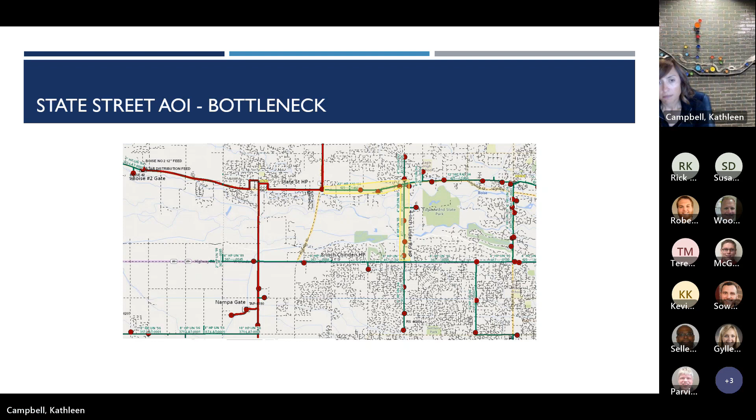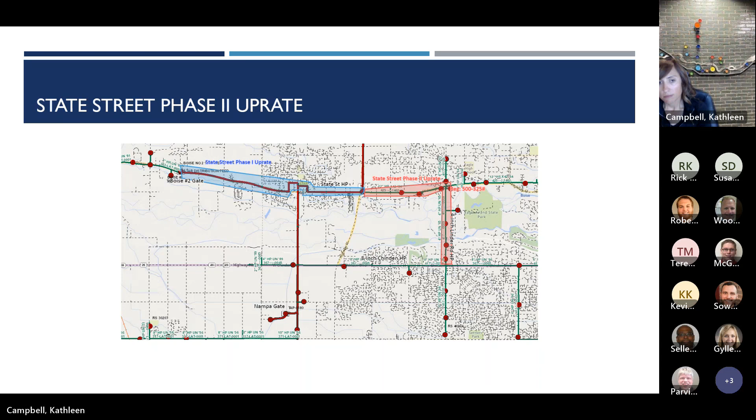So yeah, I think this is the last slide I had. Any questions on the State Street AOI? Okay. We'll move on. Next up, we got the Central Ada AOI. So this AOI needs reinforcement by 2023 to meet the IRP growth predictions. Its capacity limiter is the 10-inch and 8-inch high pressure bottleneck on Meridian Road and Victory Road.

This one was discussed at length in the 2021 IRP, and we selected the 12-inch South Boise Loop. The 12-inch South Boise Loop, actually another one of my projects, is going to be online in fall of this year. We're very close. And it's estimated to cost 17.9 million. And there's kind of 3 parts on the South Boise Loop.

So we upgraded the Kuna Gate station, and then we installed 3.7 miles of 12-inch high pressure up Cloverdale. It's called the 12-inch Cloverdale project. And then we're also going to do a regulator station near Victory and Cloverdale. And that station's going to cut from 500 to the 390. I'll show you in just a sec. I have some exhibits, so it's tough to verbally explain. I think I'll go through it again with the pictures.

But yeah, the Kuna gate's just about wrapped up, and the Cloverdale's online and in service. We're waiting to install a hoist system to do maintenance at the Kuna gate. So we've been working with a consultant on that design, and we're hoping to get that installed in the next couple months, so they can do maintenance and get it in service.

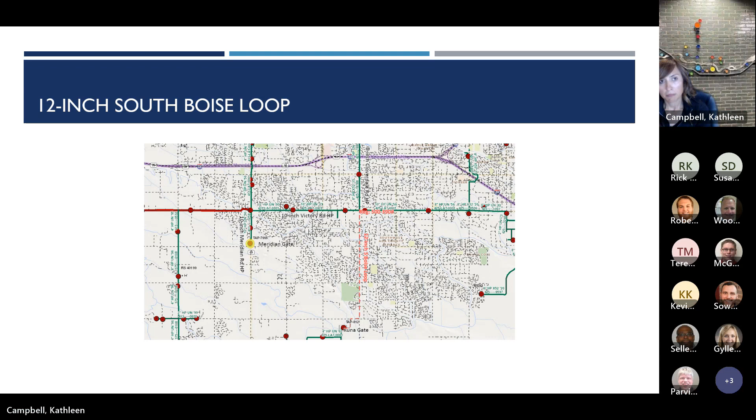So next up, we got the Sun Valley Lateral AOI. So this AOI requires reinforcement by 2023 to meet the IRP growth predictions. We briefly discussed, but the capacity limiter on this lateral is the end of line pressure to Ketchum. And basically all the flows are just at the end of the line on this lateral. So up in the resort community, lot of growth, condos, large houses, lot of gas demand up on the north section that has compromised the lateral.

Alternatives considered for this AOI were actually discussed back in the 2019 IRP, and we selected the Shoshone compressor station. The Shoshone compressor station is currently scheduled for commissioning this month. So they've been working hard getting that project installed. I know the compressor's on site. Most of the work on site's done for that.

The building's installed. They are just waiting on a little bit of electrical and site work to wrap up, and then they're going to go through commissioning. So that'll be online by fall. And then it's estimated to cost $6.7 million right now. It's the current estimate. I got some exhibits too.

So yeah, this is kind of the bottleneck, just end of line pressures, just so much flow, and pressure drop just down the lateral with all the flow at the end of the line. Currently we have the Jerome compressor station, kind of an older compressor station. It's been around for a little while. It's right here. And then on the next slide, we're putting the Shoshone compressor station just further north up the lateral. And it's near milepost 32 near Shoshone. Any questions on the Shoshone compressor station?

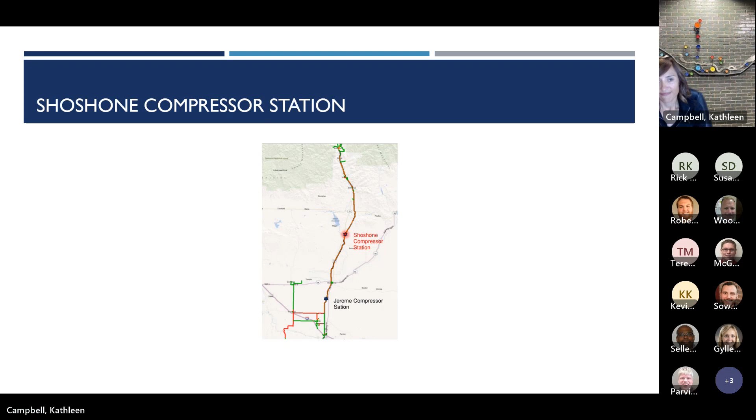Okay, so now I'm actually going to kick it over to Zach, and he's going to cover the Idaho Falls lateral. Yeah, thanks, Kathleen. Again, Zach Soward, engineer within the engineering services department. Be chatting about the Idaho Falls lateral. It was determined back in the 2021 IRP that in order to meet the growth predictions at that time, reinforcement would be needed by 2024. And really that capacity limiter is the end of line pressure up in St. Anthony.

Just to give you an idea of the system, we'll show an exhibit on the next slide, but we get gas from Williams down in Pocatello, and the IFL, Idaho Falls Lateral, takes that gas and pressure all the way north and ends at St. Anthony. Really the limiter at this point through growth modeling is the line pressure at St. Anthony right now. Alternatives were considered and discussed in the 2021 IRP, but ultimately that Blackfoot compressor station that Kathleen mentioned earlier, Rick, was selected as the appropriate option to support the additional growth and needs on the IFL.

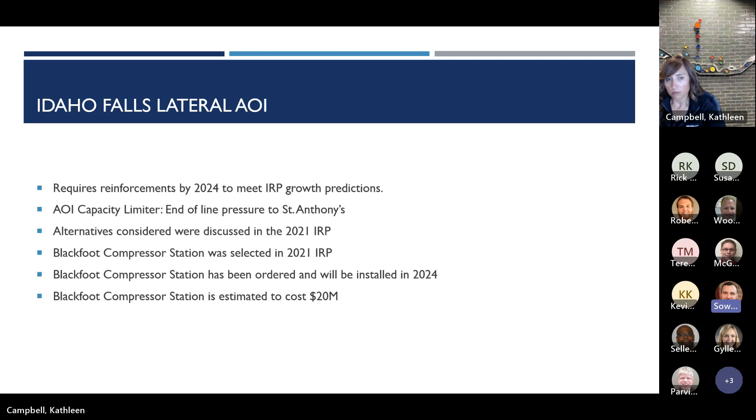The compressor station itself has been ordered through the manufacturer and is planned to be installed in 2024. There's building, land, and design considerations that are still underway right now. But the compressor station has been ordered. Altogether, the project does have an estimated cost of $20 million, and that would include the additional piping in order to pipe up to that new compressor station. If you want to go to the next slide, Kathleen.

This is that exhibit of the IFL as a whole, really with the gate station from Williams down in the south there in Pocatello, and these lines taking it all the way to the north in St. Anthony, experiencing a lot of growth immediately around Idaho Falls, but along the whole lateral as well. That growth really dropping pressures up in St. Anthony. We do currently have the Rexburg LNG facility that on Brian's slides you can see is currently meeting the demand as of this year, but by 2028 will not. So determining the need for additional reinforcement in that compressor station.

Rick, going back to your point, we did evaluate this year as well to make sure that is still the appropriate option, and that would still be the appropriate option for the IFL here. The next slide shows some proposed areas that we had worked on previously. We have determined that middle star there, where the current IFL comes together, we have land acquisition in place for that site right now. Again, looking at capacities, this compressor station would bring on roughly 21% additional capacity up to that St. Anthony area and along the lateral itself. Again, with the construction plan for 2024. Any questions on the IFL?

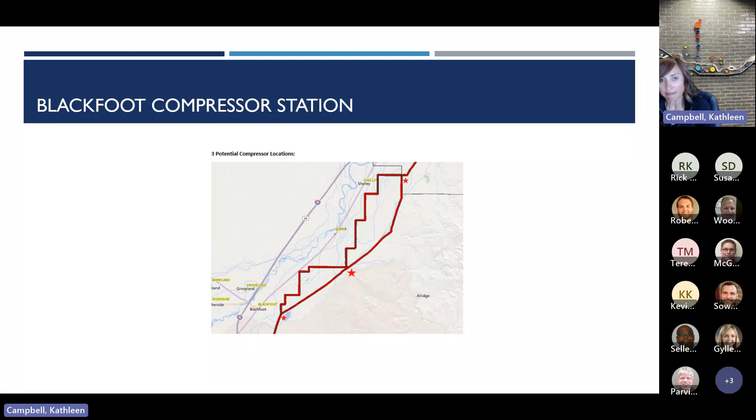For State Street, for timing, it needs reinforcement by 2025, and that will be the State Street uprate, and it'll bring us up to 950, I guess, 100,000 therms a day. And then also by 2026, we need the State Penn Gate upgrade. And that, I'll just point out this one, it doesn't increase capacity because it's limited by the State Street uprate capacity. Just the physical gate needs the upgrade.

And then for Canyon County AOI, it needs reinforcement by 2023, and that's the 12-inch Ustick Phase 3 project that's going to be starting construction very soon. And it's going to bring the capacity up to 1,390,000 therms per day. For the Sun Valley Lateral, it requires reinforcement by 2023, and that is the Shoshone compressor station that will be online this year. It's just about complete, and that will bring the capacity up to 247,500 therms per day.

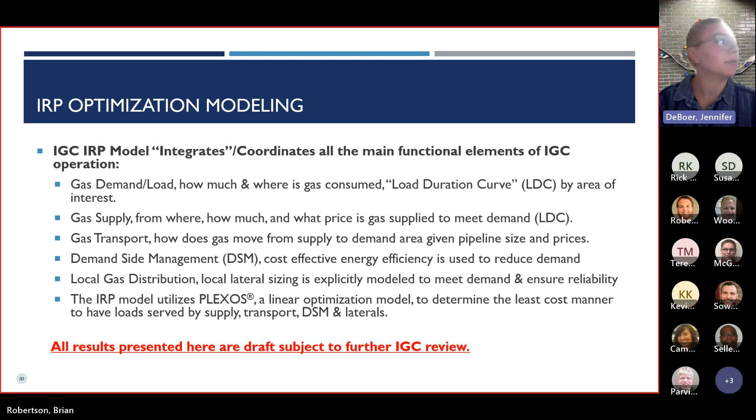What is optimization? Our PLEXOS modeling uses a standard mathematical technique called linear programming to optimize least cost planning over all possible combinations, subject to constraints. The model knows the exact load and price for every day of the planning period, based on the analyst's input, and therefore minimizes costs in a way that would not be possible in the real world. All of our inputs, everything from the price of gas every day to the load demand every day, need to be estimated to put into this program.

And therefore, there are limitations when it comes to what we can take from the model. It's really helpful, but it's not perfect information. It's not a perfect picture of what the future is going to be. It's just kind of a roadmap to see where we're going and what we need to do. And this program selects from a mix of resources over the entire planning horizon to meet the forecasted loads.

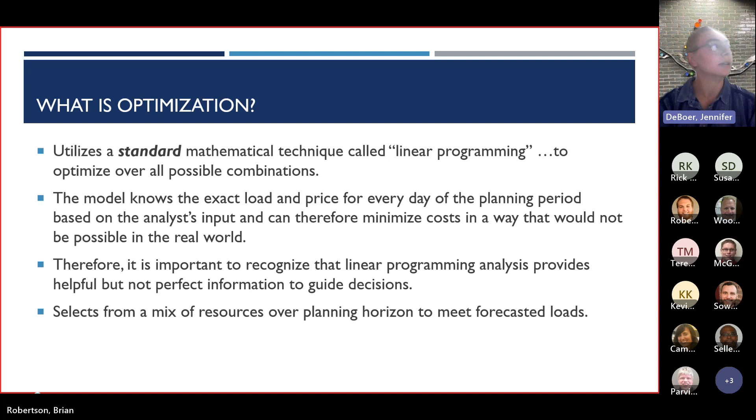Some of the model elements are the demand forecast by each area of interest, our traditional supply resources, which is our existing and potential gas supplies by basin, our storage resources, and our transportation capacity resources. We also have our price forecast, and then we also modeled the non-traditional supply, which is new distribution capacity, renewable natural gas, demand side management, etc.

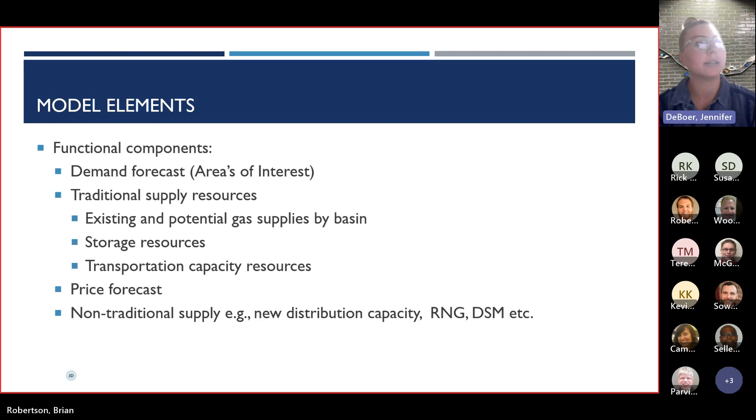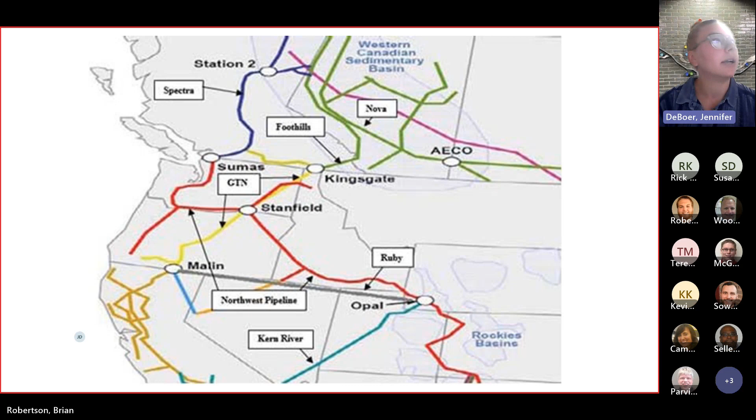First thing is transport. You can see those little black rectangles. These contracts are the means of how Intermountain gets the gas from the supplier to our end user. Each transportation contract has an MDQ, reservation charge, flow charge, and a fuel loss percentage. MDQ, or maximum delivery quantity, is the amount of gas Intermountain can move on the pipeline in a single day.

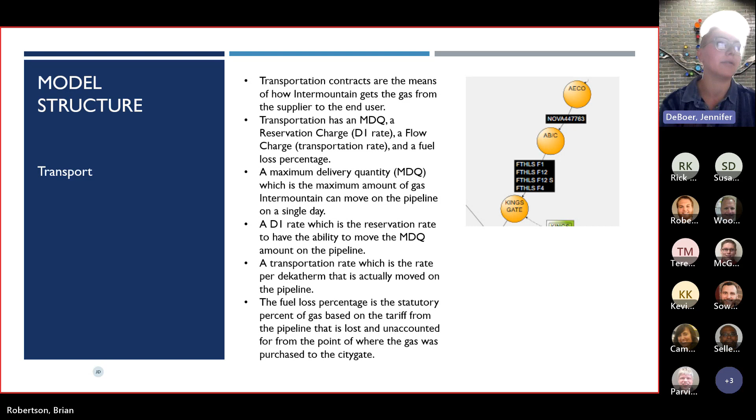A D1 rate, or a reservation charge, is like your fixed cost. It's the rate to have the ability to move a certain amount of capacity on the pipeline. The transportation rate is like your variable cost, and it's the rate per decatherm that you pay to physically move the molecules of gas along the pipeline. The fuel loss percentage is the statutory percent of gas based on the tariff from the pipeline that is lost and unaccounted for from the point where the gas was purchased and then onto our city gates.

Next is storage, which are these cyan cylindrical figures. Intermountain has storage at 5 locations: Jackson Prairie, Plymouth, Clay Basin, Nampa, and Rexburg. All the storage that needs to be cycled is put in at their targets for 35% by the end of June, 80% by the end of August, and 100% by the end of September.

Intermountain can withdraw approximately 30,000 decatherms a day from JP, 155,000 decatherms per day from Plymouth, and 70,000 decatherms a day from Clay Basin, for a total of about 256,000 decatherms a day of off-system storage. Intermountain also has Nampa and Rexburg on-system storage, and can withdraw approximately 60,000 decatherms a day from Nampa and 5,500 from Rexburg, for a total of about 65,500.

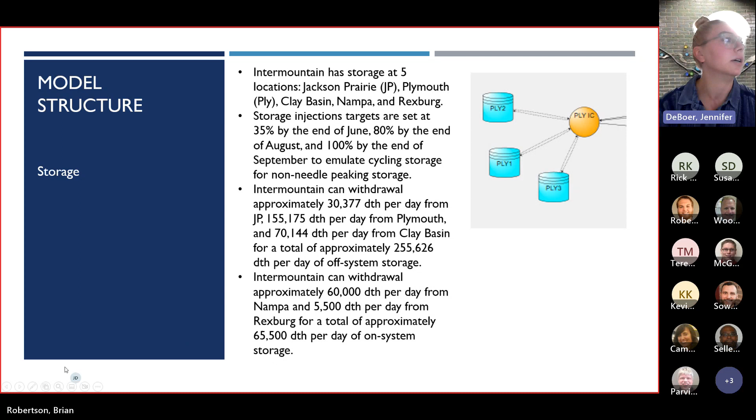Next is supply, which we get from 3 markets: AECO, Sumas, and Opal. Each market, we can purchase gas at different locations along the pipeline. It doesn't just need to be from the original basin. For each year, Intermountain uses winter base, summer base, summer day gas, winter day gas, and peak incremental supplies as inputs. Over the planning horizon, the contracts are renewed in our Plexos modeling system in November and April.

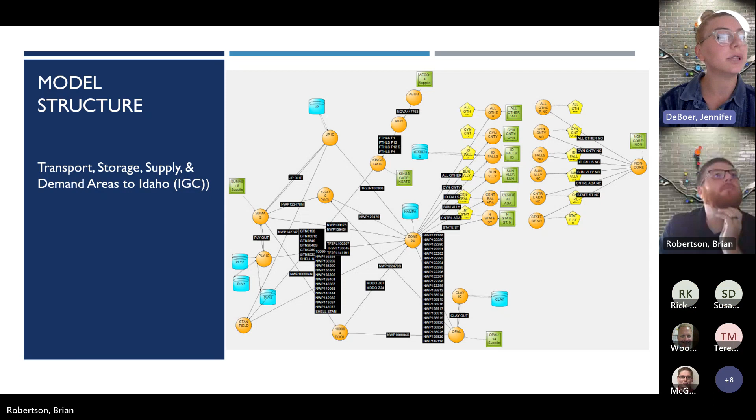Yes. Hi, this is Kevin. How long have you been using Plexos? I believe we started using it last winter. Brian knows more exactly when they started using it.

Yeah, so SENDOUT was our old system that we used for our upstream optimization modeling. And the owners of SENDOUT had not been updating the model, and it was no longer going to be supported through Windows starting in October of this year. So we looked at moving to another option. Plexos is very similar to SENDOUT. It actually has a few more capabilities than SENDOUT. And so it essentially works exactly the same as SENDOUT does.

And Jenny was right. We contracted them beginning of 2022; that is when we started using Plexos.

Thank you. Yep. And just for clarification, the pictures that you see here, these are still pictures from Sendout, mainly because Sendout currently has a better way to view the system when you set it up like this. The Plexos model has a way to do something similar, but it doesn't display the names as well. So that's something that we're going to be working with Plexos to see if they can

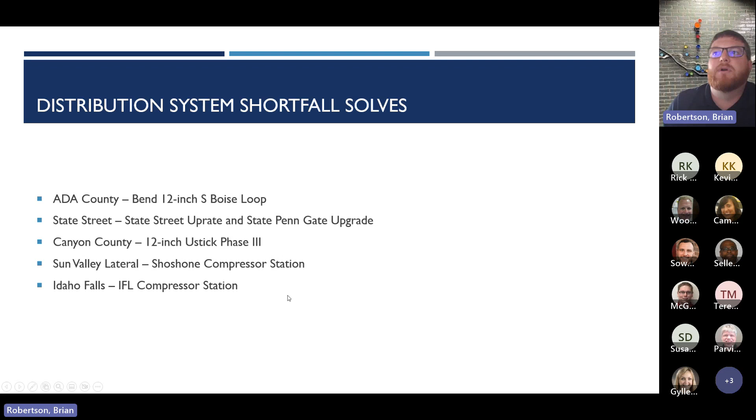Sorry to interrupt. This is Rick Keller again. So with respect to your model, you actually introduce the details of your distribution system into the model. And so from there, based off your load, you're looking specifically into your distribution system to see where there's constraints and whether or not the system's capable of providing that capacity to meet the load. Is that correct?

Yeah, that's correct. And going back to this slide, I can walk through it a little bit. I don't know if you guys can see my cursor, but... Yes, we can. Sorry. This here on this side is all the core. This is what we have to plan for on the upstream side. And so you'll see Canyon County, Idaho Falls, Sun Valley, Central Ada, State Street. It all connects to this Zone 24 or IGC node.

This is the node that we pull all of our transport, all of our storage, TF2 transport. We pull it here, and then we distribute it to the different gates. So this is our firm upstream capacity that we have to plan for. Our non-core or T4 customers, we don't plan for their capacity. So here we just give them as much capacity as they need.

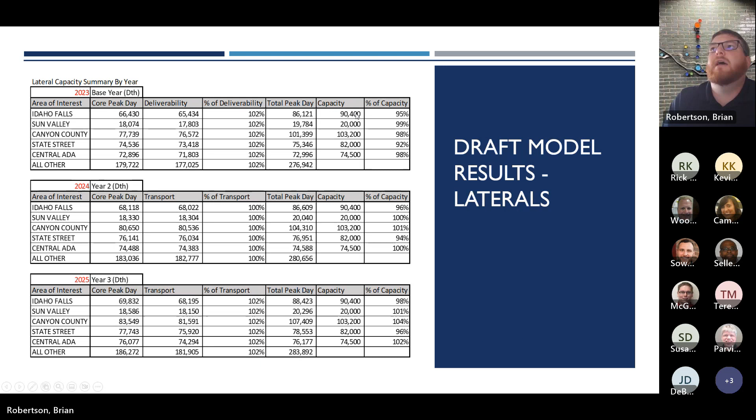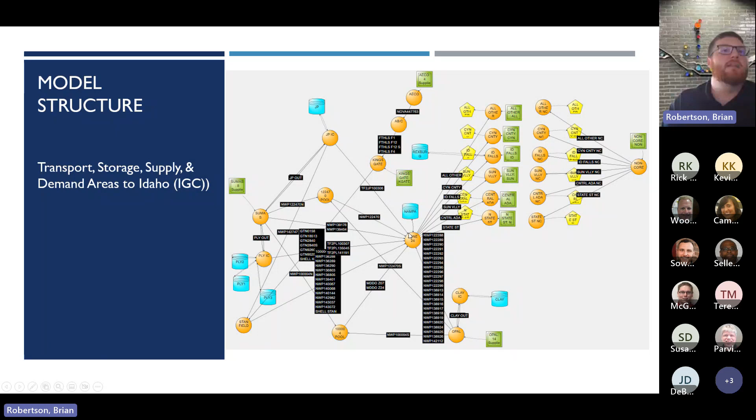call a constraint. So let's say for Idaho Falls, I don't remember what the exact number was, 90,400. It looks like core peak day is 66,000 and this is 20,000. So here we're looking at 66,000 flowing on Idaho Falls to the core side, 20,000 flowing here. So we're at 86,000. The max capacity that can flow on these two contracts at the same time is 90,000. So yeah, we do include the distribution system modeling in our upstream modeling planning software as well.

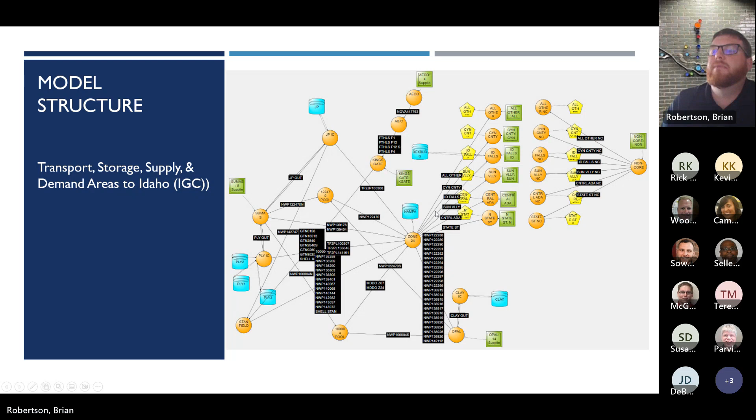Okay, thank you. Yep.

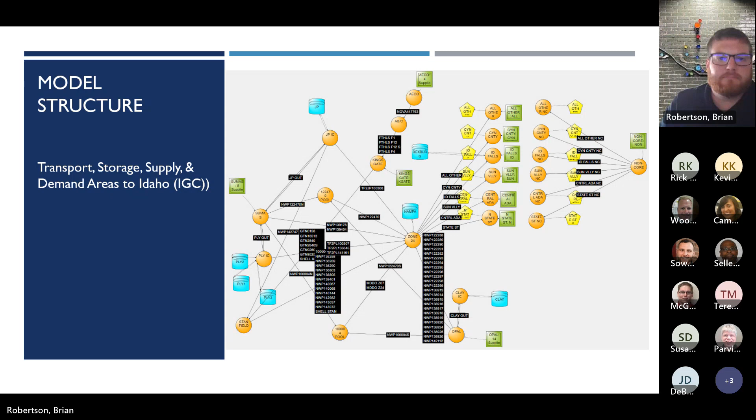So on the upstream transportation, to solve any of the shortfalls, we're looking at contract renewals, first and foremost. GTN Express, after we had done the capacity segmentation, looking at getting more GTN capacity. There's a big opportunity of getting the cheaper AECO gas. So looking at more GTN is a big benefit to the Intermountain customers. We're also looking at any alternative transportation uptake.

So once we gather the known capacity upgrades that we can go out and get, the 21,000, the GTN Express 79,000, there's still a little bit of alternative transportation uptake we need in that final year of the optimization. I think it was about 15,000 decatherms. So we'll be looking at some Sumas or some more GTN if possible, as well as the Rockies.

We also looked at renewable natural gas. We put that into the upstream optimization model. We put it as an on-system resource because we would be looking at the actual gas molecules rather than the attributes itself. But renewable natural gas does present a little bit of an issue with the higher costs, so it was not selected, but it was modeled. Sorry about that. And then if there's any other upstream optimization models that anyone wants us to model, please let us know and we can definitely take a look at that.

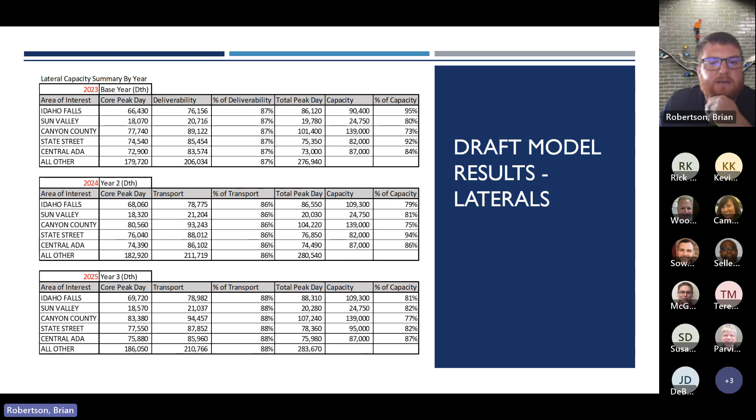And then similarly on the distribution side, you can see I've plugged in the capacity enhancements when they're happening based on that summary slide that Kathleen had presented. So once they go in, whichever year they were applied to, I put them in, and you can see that we don't have anything exceeding the max capacity in terms of our design peak day events. Are there any questions there? Okay.